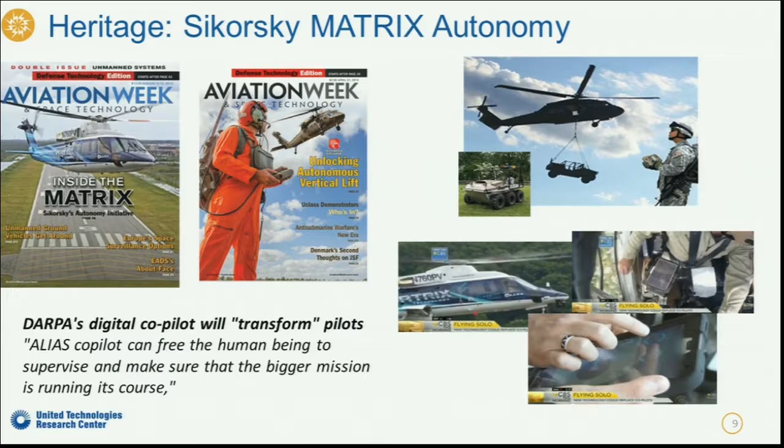That's basically how we got started with all of this autonomous planning and perception capability development. Essentially at UTRC, we tend to develop some of the high-risk, low TRL level capabilities, starting out within a simulation environment.

At this stage, we tend to work with a lot of external partners, university partners, other industry partners, leveraging some external funding to a certain extent. And then we would demonstrate some of these concept capabilities on low-cost, small UAV and UGV platforms in our in-house lab facilities. Once we validated some of these algorithms, we then would transition this into joint projects, working with our business units.

In that case, it was Sikorsky aircraft. So we're starting out within their simulation environment where you would do hardware-in-the-loop simulations to validate your algorithms on flight simulators and eventually integrate some of these capabilities onto full-size commercial products, including some optionally piloted vehicle demonstrators. This is essentially a similar kind of workflow that we do with a lot of the applications across both the aerospace and commercial domains.

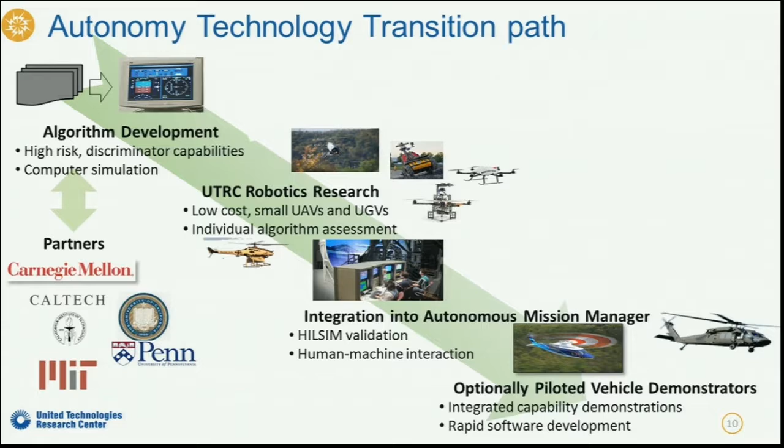So these are essentially some of the capabilities that we develop out of these early years in the autonomy program. There's the autonomy architecture, which we try to keep as reusable, flexible, and scalable so that it can be applied across multiple application domains.

And then there's the perception capabilities, which essentially takes the onboard sensor data and turns it into models of the world around you. Some of the familiar things you see here include SLAM, vision-based navigation, similar types of technology that you would see on autonomous cars, but within a helicopter domain.

And then there's the human-machine system component, which is, of course, vital to these optionally piloted vehicles where you still have mixed human-autonomous system interactions. And then there's the planning component, where I mostly work, essentially in how you take the information provided by perception and make intelligent decisions about what the autonomous platform is going to do.

So what I should say is that Sikorsky - that was somewhat within UTC up until 2015. Up to that point, the autonomy program tended to focus a lot on the autonomous vehicle side of things.

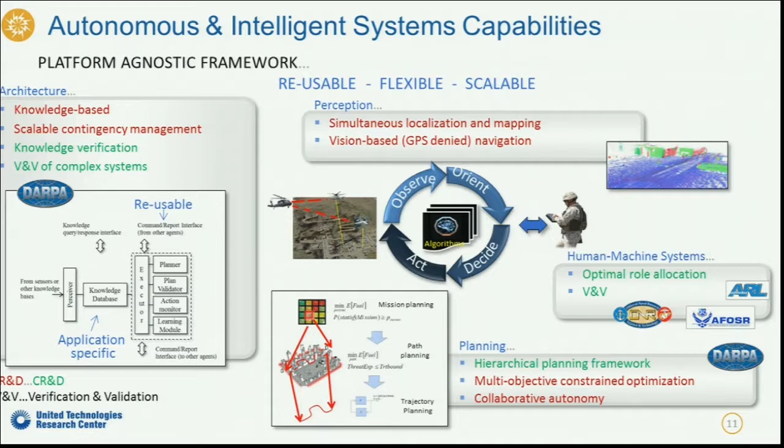But afterwards, it transitioned into somewhat different application domains, while we kept some of the similar core capabilities shown here. I'll talk about that a little bit later, essentially within the context of some of the human-robot collaboration work that we've been doing recently.

So that was the way we develop and transition these technologies - we validated all of the algorithms on our in-house lab facilities. We still retain an outdoor lab, which we used to do a lot of work with for our autonomous vehicle platforms. And we're also expanding some of the indoor test facilities where, for some of the newer applications, we're looking at indoor inspections, human-robot collaborations, that kind of thing.

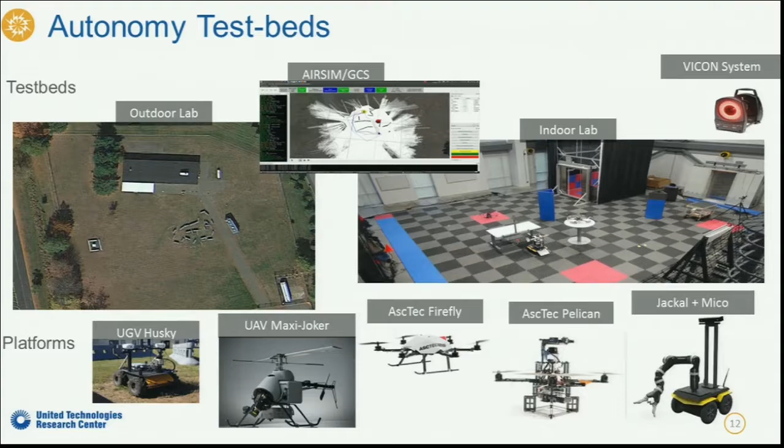So we have a range of different platforms that we test our algorithms on - outdoor ground vehicles and aerial vehicle platforms, some indoor instantiations of that, and also some of the newer robotics manipulation platforms that we have.

So what are we working on currently? The current instantiation of the robotics initiative is called the Intelligent Robotics and Integrated Systems. What we're interested in here is essentially collaborative autonomy between groups of humans and robots in applications such as manufacturing, service, inspection, and repair.

This is somewhat of a different application focus towards more broad-based business cases across the commercial and aerospace domains. The idea is to add autonomy and intelligence to existing hardware platforms. For example, you have these industrial robots that do largely automated tasks in isolated work cells. What we want to do is add some of the higher-level perception, planning, and human-machine interaction technologies to enable them to work collaboratively with humans in a work cell. So that's the kind of application we're targeting.

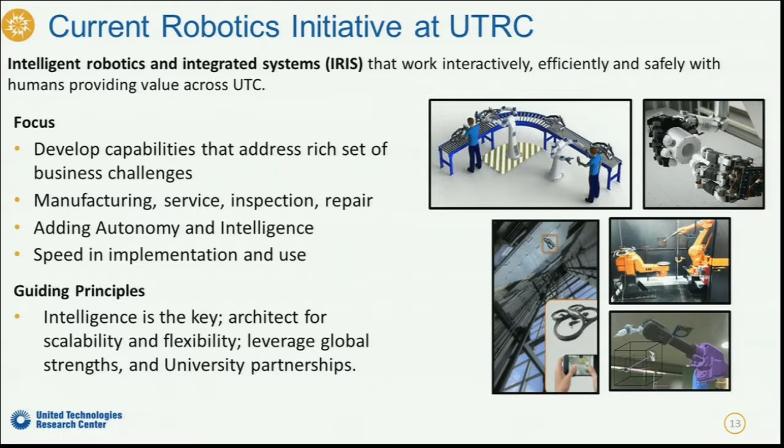So this is just some of the broad application scenes we're looking at, including inspection robots for buildings and aircraft types of applications. This is motivated by a lot of the business use cases across our commercial and aerospace business units, and also advanced manufacturing, which again cuts across multiple application domains.

Again, the idea here is to have collaborative work cells where you have both humans and robots working closely in proximity. So how do you develop the technology to enable that kind of concept?

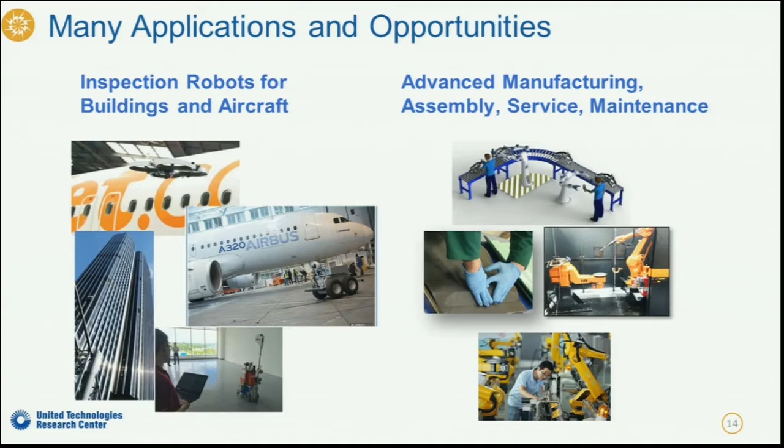Okay, so this is essentially an overview of some of the broad capabilities we're looking at within this human-robot collaboration context. And so what you see is a lot of same themes carry over from the autonomous vehicle domain, but within slightly different application contexts. So we're still interested in planning.

So how do you do high-level reasoning, multi-agent planning for human-robot systems? We're still interested in perception. How do you build up models of the world around you using vision, lidar sensors? How do you do object recognition? How do you recognize human intent? And of course, we're still interested in system integration, so how you tie these systems together. That's where the architecture component comes in.

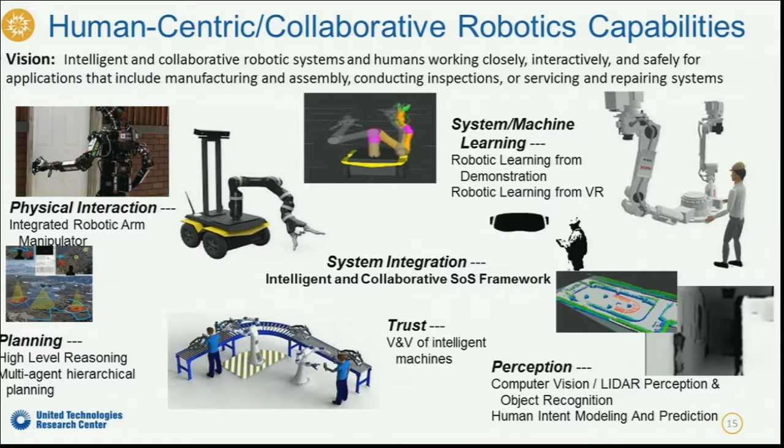But some of the newer areas include physical interaction. So this is the robotic manipulation aspect. How does the robotic platform interact with its world, the world around it? And also the system machine learning component, which has to do with how humans and robots collaborate together, and how does the machine adapt to the actions of the human. So here we're interested in things such as robotic learning from demonstration, robotic learning from VR, and that kind of line of work.

So what I'll do next is go over a set of research topics that we're currently actively working on. The idea is not to go over too much technical detail, but more to present the overall problem statement that we're interested in, and also some of our technical achievements to date. Hopefully that will provide a platform to generate some discussions for areas for collaboration.

Okay, so the first topic I'll talk about is essentially hierarchical mission and path planning. The problem we're interested in here is essentially how do you go from an abstract specification for a task that you want an autonomous agent to do to concrete motions and actions that can be executed by the platform itself. An example could be a cargo pickup and drop-off mission, where you just want to go from a starting location, go to a pickup location to pick up your cargo and drop it at one of the drop-off locations, and then return to start.

And you would want to minimize the time of arrival, and then also subject to certain constraints such as avoiding certain no-go zones within the city.

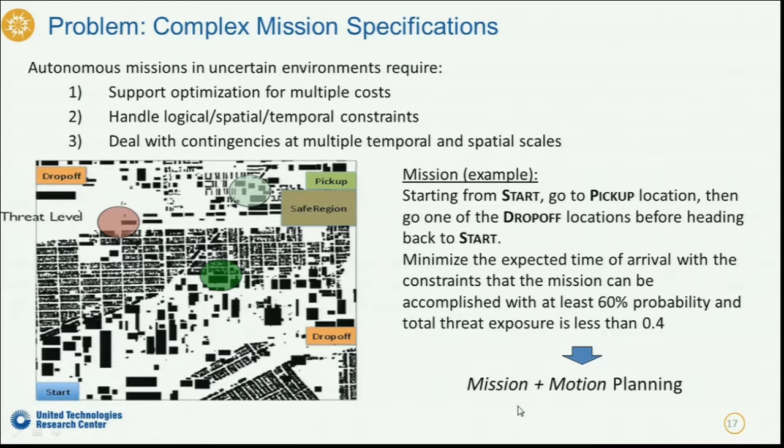And then you also have to deal with contingencies on multiple time and spatial scales, because a lot of times things don't always go according to plan. If there are other dynamic obstacles in your environment, or your mission specification changes on the fly, how do you handle these on the fly? Essentially, this means that you have to plan your actions at multiple levels of temporal and spatial scale, including both strategic decisions at the mission level and also the motion plans at the tactical level.

So essentially, our approach to this is through a hierarchical planning type of framework. This involves both making strategic decisions at the mission planning layer, where you answer the questions of where do you want to go - how do you perform this type of cargo pickup and drop-off mission, the type of tasks you need to perform, and the sequence that needs to be performed. And then the path planning and trajectory planning layer answers the question of how these tasks get performed - how do you plan an obstacle-free trajectory using your path planning algorithm, and then how do you handle the dynamics of the underlying vehicle platforms through trajectory planning.

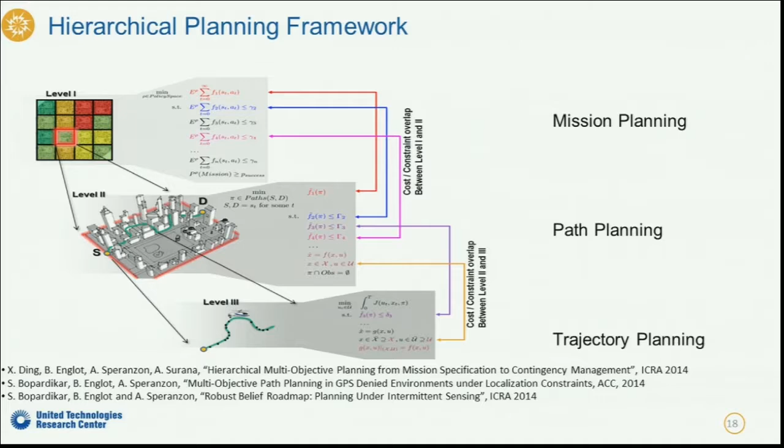So this is one way to decompose the complexity of the problem, and also to handle the different temporal and spatial scales that exist across a lot of these autonomous planning problems.

I'll just present some high-level overviews of some of the algorithms we've looked at for the different layers of this planning hierarchy.

At the highest level, what we look at is the strategic planning. Essentially, this answers the question of where do you want to go. How do you generate the sequence of tasks that needs to be performed and what types of tasks you need to perform? The way we handle that is through a constrained Markov decision process.

Essentially, you construct an MDP approximate abstraction of the high-level planning problem. The states could be as simple as different sectors of the city. The transitions essentially abstract the motions that are planned by the low-level path planner through each sector of the city. The advantage here is you can handle a rich class of mission specifications. You can specify the order in which tasks are executed, and also what types of tasks need to be executed. You can optimize over that using this MDP abstraction.

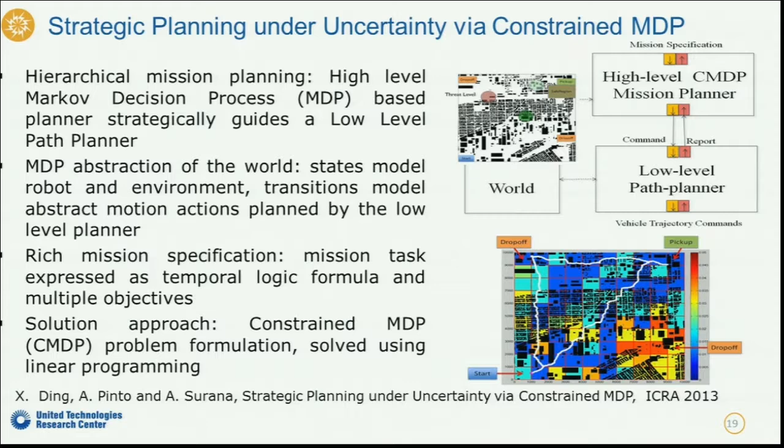Just to provide some graphical illustration, essentially what we have is a high-level knowledge representation of the overall mission specification. And we have some automated algorithms which turn this into an MDP abstraction of the overall mission that you want to perform - essentially the sectors of the city and the types of actions that can be executed by the path and trajectory planners. Then the high-level mission planning problem essentially turns into an optimization problem on the MDP process.

You can actually generate an optimal policy which then gets passed on to the next layer, which is a path planning layer. And then what we have is essentially a plan monitoring function to monitor if anything changes in the environment, and also if there are any pop-up obstacles that come into your way, and how do you dynamically replan along the way. That's somewhat of a separate topic - how do we handle that?

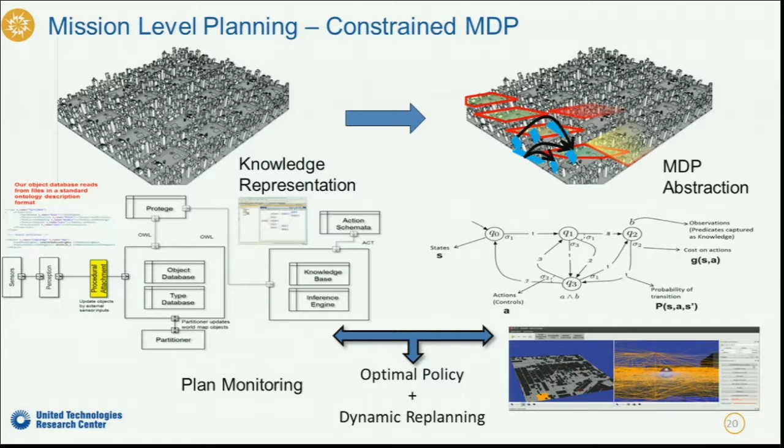Going to the next level of the hierarchical planning, essentially that's where we have the obstacle avoidance. I think a lot of people are aware of some of these obstacle avoidance algorithms such as PRM, RRT, these sampling-based planners. But one of the extensions we looked at in this area is essentially how to consider multiple objectives within the path planning problem.

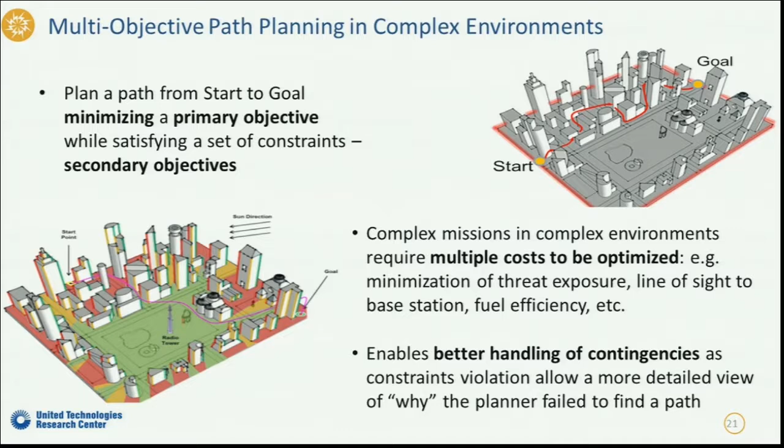Within this context, the problem you want to solve is to plan a path from start to goal while minimizing a primary objective subject to a secondary constraint. The secondary constraint can be multiple types of things - it could be line of sight to a base station, fuel efficiency, or just part of the city that's a no-go zone that you want to avoid. So the shortest path may not always be the best path to take. How do you actually plan your obstacle-free path within that context?

The approach we looked at in this case is essentially an adaptation of Dijkstra's algorithm, but adapting it within a multi-objective context where, instead of computing a shortest path from start to goal, you look at computing a family of paths which essentially forms a Pareto front that you can perform your trade analysis over.

In this example scenario, you have essentially what we refer to as a threat in the environment, but it could essentially be a no-go area, no-fly zone, or dynamic obstacle - you can think of it that way. What you want to do is minimize the path length while subject to a constraint: you want to be exposed to this threat as little as possible. So what you can see is we generate a family of these paths, and the color coding is the secondary cost. The shortest path gets you closest to the area you want to avoid, so it has a high secondary cost. If you want to minimize your exposure to that, you might want to take some of the longer paths around with some of these other trajectories within this family of paths.

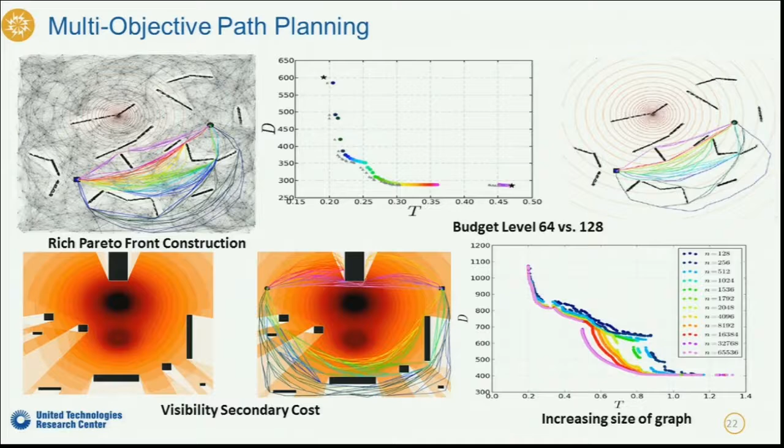So essentially, this is our multi-objective path planning that we looked at. And then the last thing we have in this hierarchical planning is essentially a trajectory planning level. This is looking at the problem of how do you generate dynamically feasible trajectories which follow the high-level path that's generated from the path planning layer.

So essentially, this becomes a constrained optimal control problem where you need to take into account the underlying vehicle dynamics to generate a feasible trajectory. Essentially, your optimization variables are the actual controls you apply to the vehicle platform itself, and also the time instance where these trajectory points are reached. So essentially, it turns into a nonlinear constrained optimal control problem, and we developed an MPC framework to actually solve for these trajectories on board the vehicle.

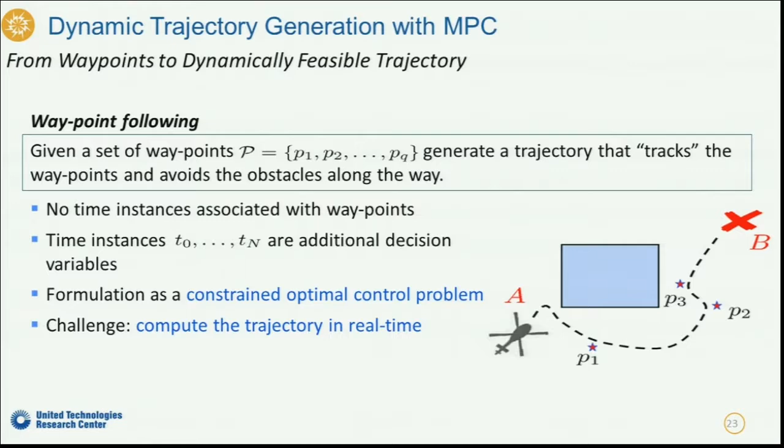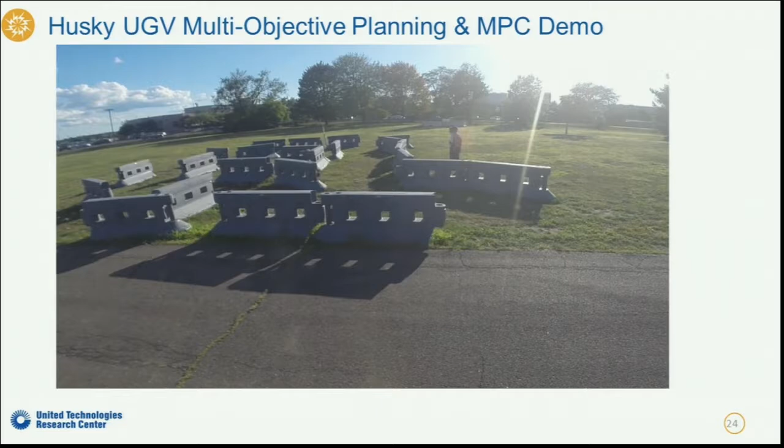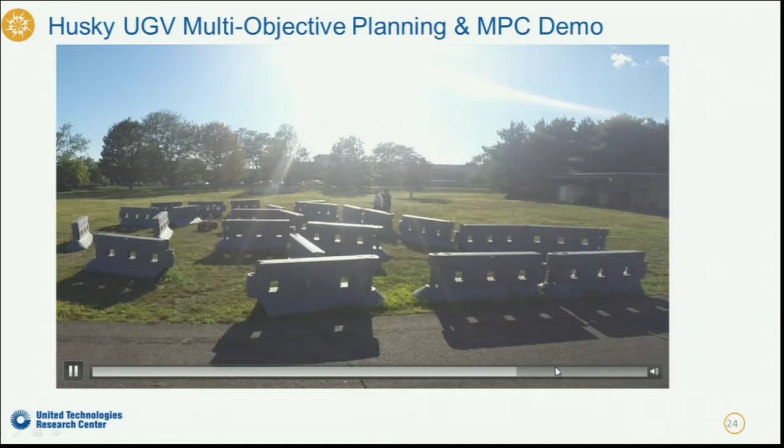But later in the video, it shows it actually executing this on our ground vehicle platform in one of our outdoor environments. Essentially, we have a ground vehicle that's outfitted with LiDAR sensors, which generates a representation of the environment through SLAM. And then we use this to generate our path plans and also the trajectory plans, which get executed on board the ground vehicle. So this is just showing the hierarchical planning executing on a full ground vehicle platform.

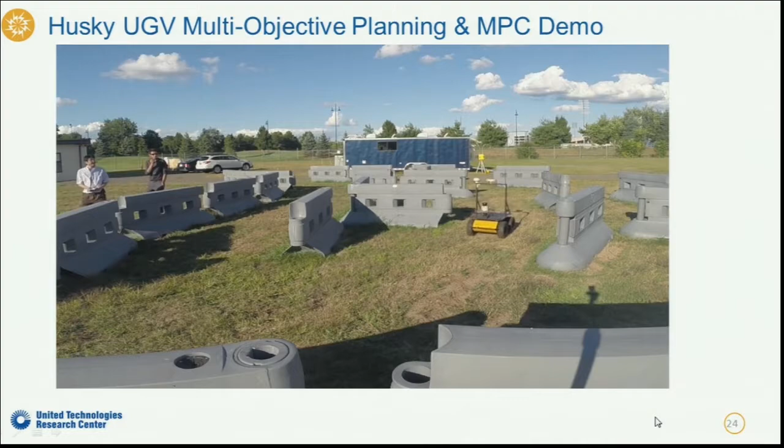All right, so with that, I'll go towards the collaborative autonomy. Essentially, within this area, what we're interested in are system architectures which enable multiple autonomous agents to come together to perform collaborative perception and planning tasks within a distributed setting. So the idea is the system architecture here should be distributed, reusable, scalable, and agnostic to the type of vehicle platforms that we apply this to.

So some of the work we've done in this area is a lot of the system architecture, for how do you design the autonomy software, and also how do you share information between the vehicles in a distributed setting. One of the scenarios we looked at is collaborative autonomy between aerial and ground vehicle, where you have the aerial vehicle acting as a scout to detect threats in the environment that are not visible to the ground vehicle. This information is communicated to the ground vehicle, and then it performs the multi-objective path planning, which I was showing in the previous video. So instead of the simulated threat I was showing before, we actually have an actual aerial vehicle performing the target detection task.

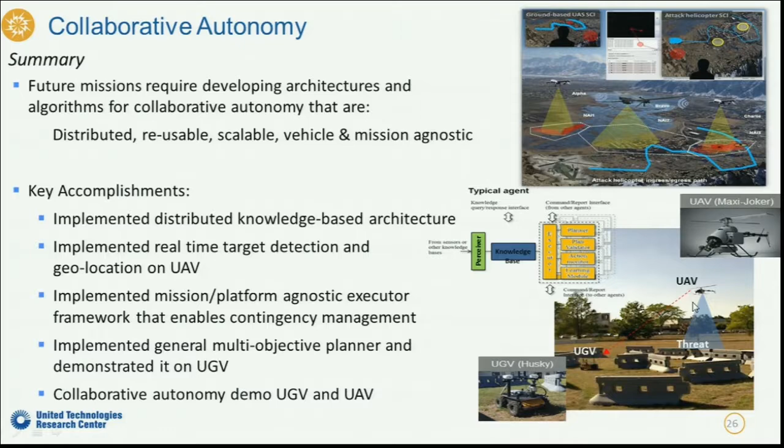This is essentially just showing some of the autonomy architectures we've been thinking about for this collaborative context. So the idea is that it's a distributed architecture where we have multiple agents with knowledge sharing. Essentially what we want to do is share the perception information among multiple agents. Also design our software architecture such that there's minimal structural changes between different vehicle platforms. And that becomes important when you consider the broad range of application domains we would like to apply autonomy to, so you'd like some of these software structures to remain constant as you migrate across different application domains.

So the collaborative aspect of this scenario I was talking about: essentially, we had an aerial vehicle which acted as a scout, which detected this threat on the ground. Keep in mind, a lot of this work was done while Sikorsky was around, so some of it had somewhat of a military connotation. Essentially, the ground vehicle was performing a convoy mission, and these threats would be detected by this aerial scout, and then the ground vehicle would perform its convoy mission, essentially avoiding these threats on the ground. So what we have here is actually a vision-based detection and localization algorithm running on this aerial vehicle, doing the target detection in real time and communicating to the ground vehicle.

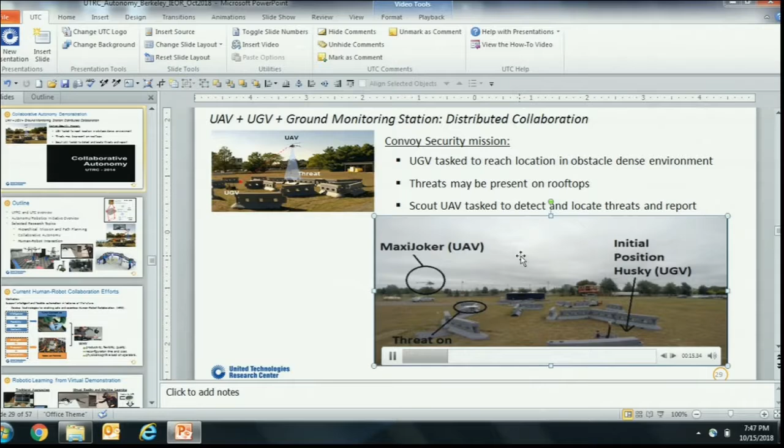All right, so I'll just show the videos within this presentation mode. Essentially, what we have is this outdoor test environment. We have an autonomous helicopter platform, which acted as the aerial scout, detecting a target on the ground, and this communicated to the ground vehicle platform, which used that information to do its multi-objective planning, and you see that gets executed on the actual platform. So it shows the collaborative autonomy aspects with joint perception and planning. That was the idea there.

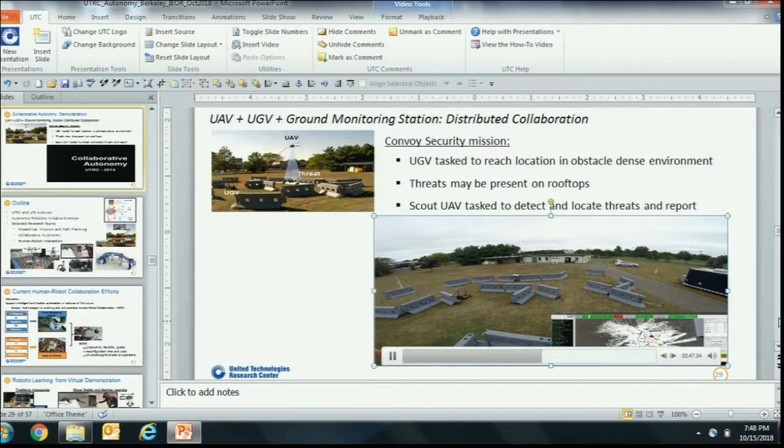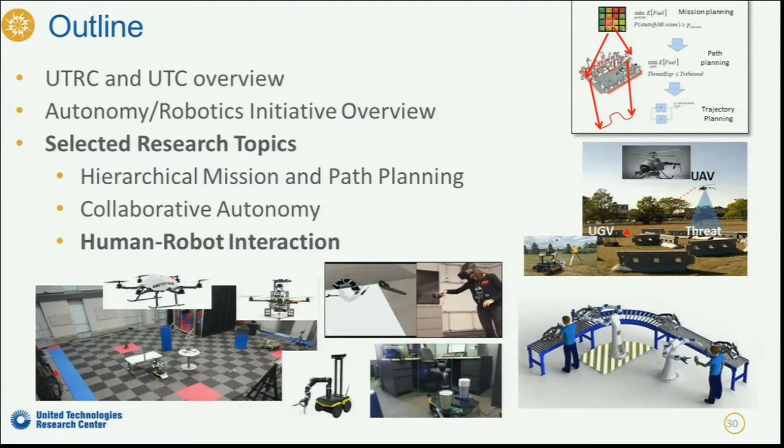Okay, so with that, I'll go on to some of the more recent work we've been doing in human-robot interactions. Within this area, the main idea is that instead of having fully autonomous or fully manual systems, we're looking at some intermediate modes where we have both humans and autonomous agents working in close proximity and in collaboration.

The motivation for that is there are certain application contexts where human operators might be preferred, especially if you look at a manufacturing context within aerospace domains, where there's still significant intelligence and dexterity needed. So some of these tasks will probably continue to have a human component. But you'd like to bring additional levels of robotic automation, which improves precision, repeatability, and efficiency. Essentially, by combining human and robot in an integrated system, you could provide better productivity, flexibility, and quality within a collaborative human-robot work cell.

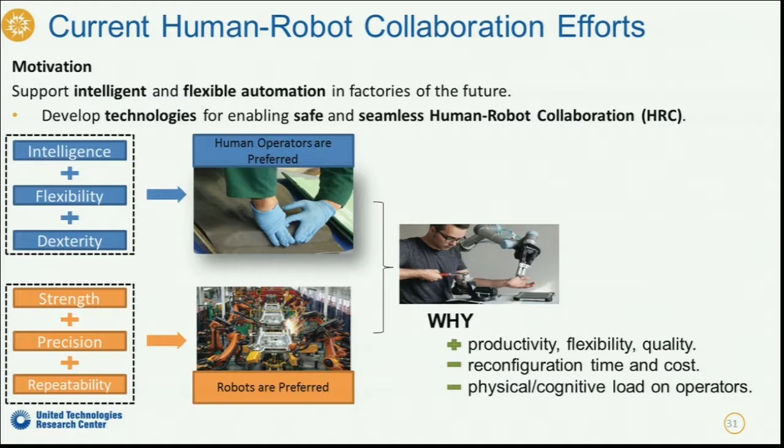So some of the technologies that would need to be developed to enable that kind of application would include essentially the perception, planning, and human-machine interaction technologies I was talking about before, to enable safe and seamless collaboration. So some of the work we've been doing in this area includes robotic learning from virtual demonstrations.

The idea here is that in a traditional industrial robot application domain, what you have is either an expert programmer programming this function for industrial robots, or a human actually teaching the robot what to do. But a lot of this effort is fairly manual, and it puts the human operator in danger when actually teaching the industrial robot. It also lacks repeatability and adaptability—every time the work environment slightly changes, you have to do this process all over again.

So the idea is by leveraging the virtual reality environment to do some of this training, you remove some of the dangers that come with a human operator teaching the industrial robot. But you also introduce additional adaptability, in the sense that if you include some machine learning components, once you've taught the robot manipulator to perform a task a few times, you can provide some limited generalization from these tasks to slight shifts in the work environment and the objects you'd like to manipulate.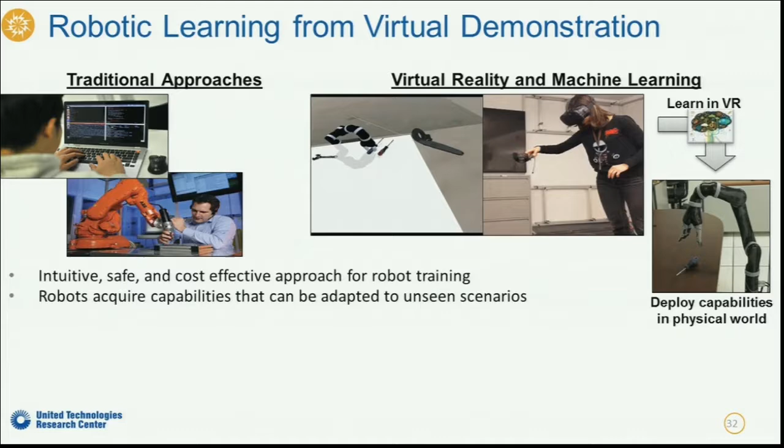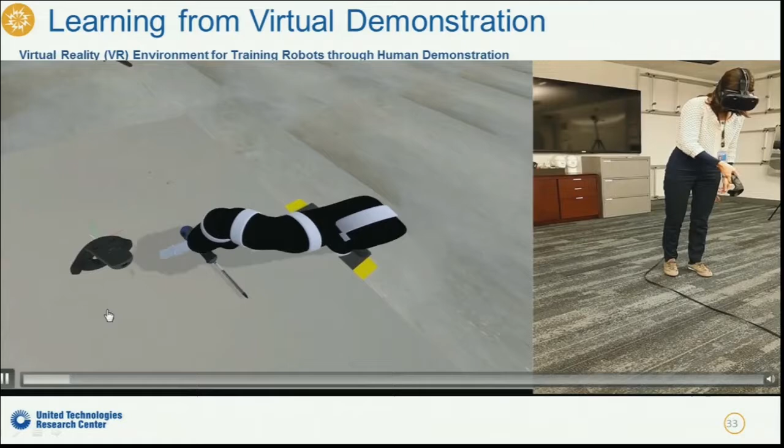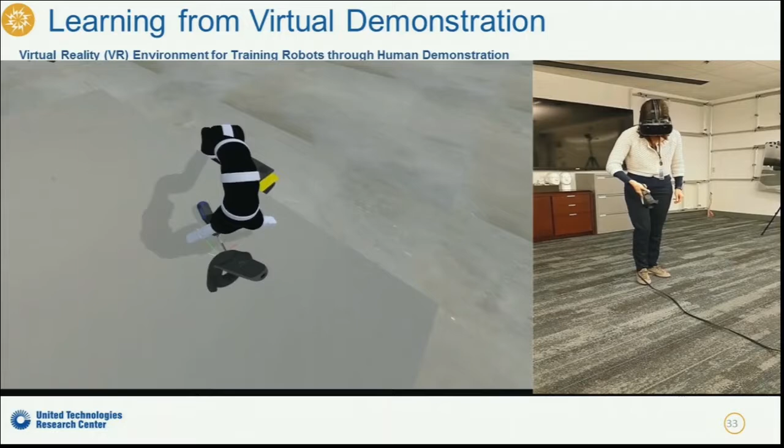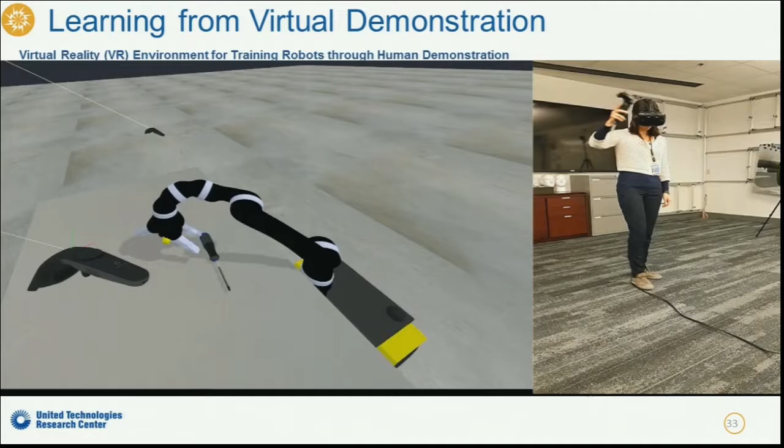So this is just one of the demonstrations we had, essentially a tool pickup task. The idea here is you want to learn how to pick up different types of objects you'd like to use for a manufacturing task—in this case, it's just a screwdriver. Essentially it's learning the grasp points you'd like to use. By doing this training phase within the virtual reality environment, you can teach it all kinds of different grasp configurations, and use that to build up a model for how you generate these grasp points when you see different tool poses and orientations in the environment, and use that on a robotic assistant type of application.

So some of the other things we're working on: there's efforts going on in the Berkeley office looking into distributed intelligent agents. Essentially, this is an instantiation of the high-level planning problem I talked about before. How do you use multiple sensors, actuators, or robotic agents within an intelligent building to optimize for various objectives? One application we looked at is intelligent egress — how do you intelligently guide human traffic flow when there's a fire in the building? How do you use these indoor building sensors to optimize for the comfort of the building occupants? There's all kinds of applications within the intelligent building domain.

Some of the other areas we're looking at include intelligent manipulation and perception. When you have human-robot collaboration, we need to plan for the manipulation of mobile manipulator platforms, combining a mobile base with a robotic manipulator. We also need to recognize objects in the environment that you'd like to interact with, and the humans in the environment, both for collision avoidance and for collaborative tasks — how do you do intent recognition and intelligent response to human intention.

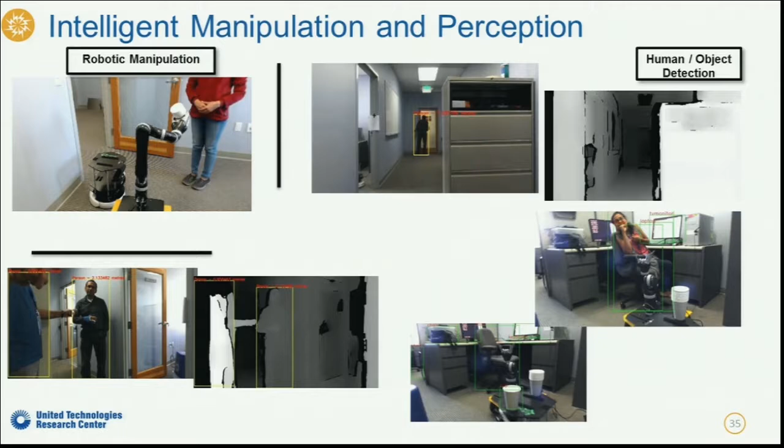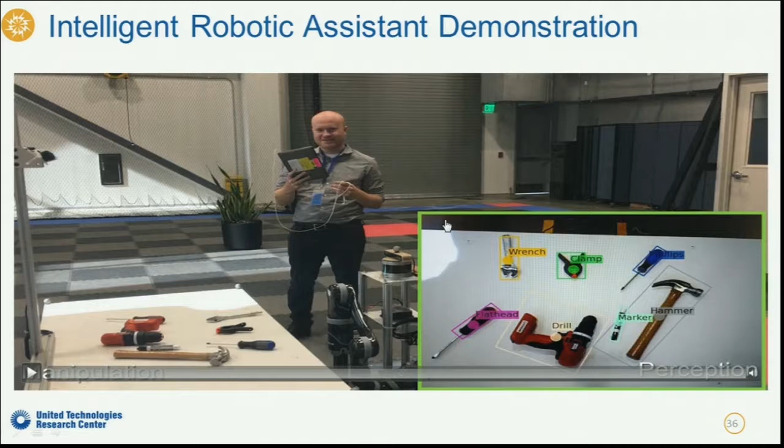To tie some of this together, I'll show one demonstration we did with this intelligent robotic assistant. The idea is that there's a set of tools spread out on a table, and the robotic assistant uses perception to identify the location and poses of the objects, then picks up the object and hands it over to a human operator. There's the planning aspect for robotic manipulation, the perception aspect of identifying tool poses, and the human-machine system component with a speech recognition interface that allows the operator to issue a command, for example to pick up a clamp. The perception system detects the location of the clamp on the tabletop, and the robotic manipulation goes and picks it up and hands it to the operator.

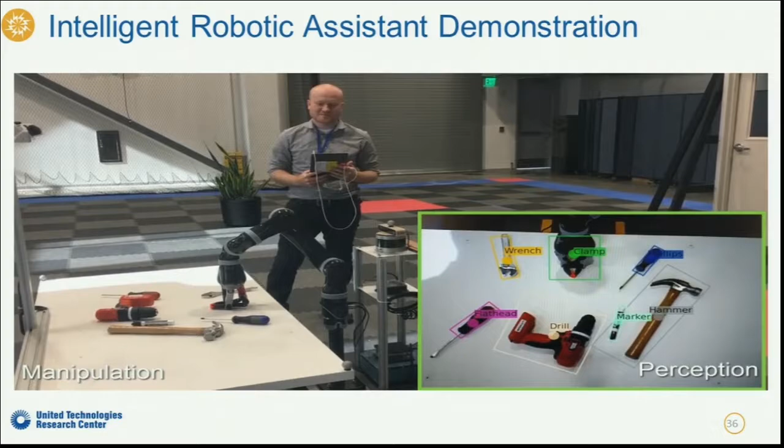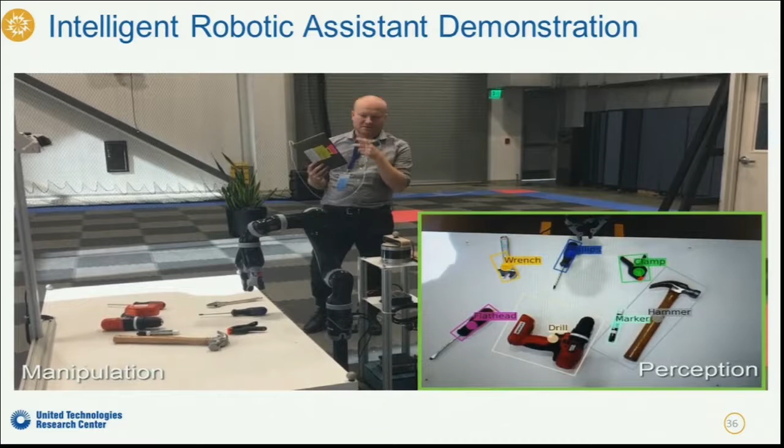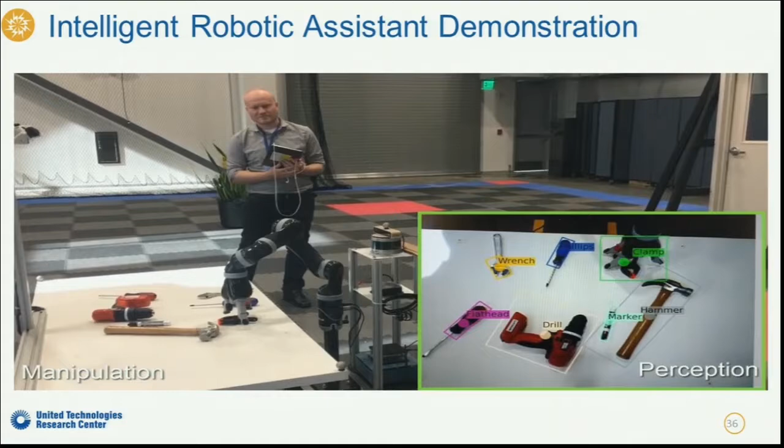So this is a lot of this work — it's still in the early stages. We're looking at the types of applications you could use for this kind of human-robot collaboration, whether within inspections or manufacturing contexts, and it's an ongoing area of development.

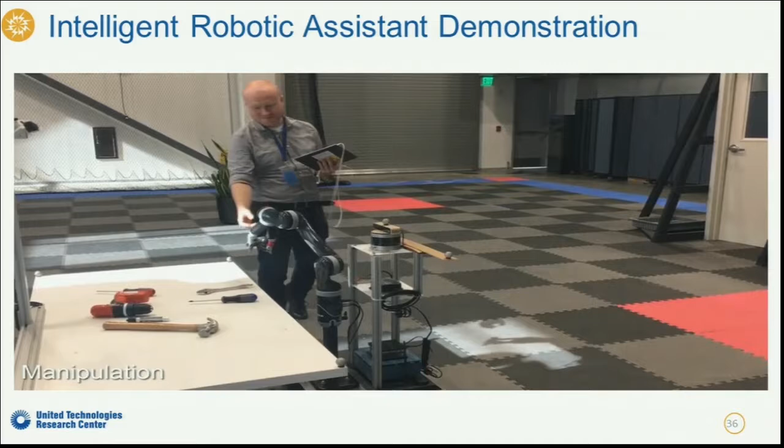So with that, that's all of the topics I was planning to talk about within the seminar. Thank you for your attention, and feel free to ask any questions you might have. I'll just leave it on this slide.